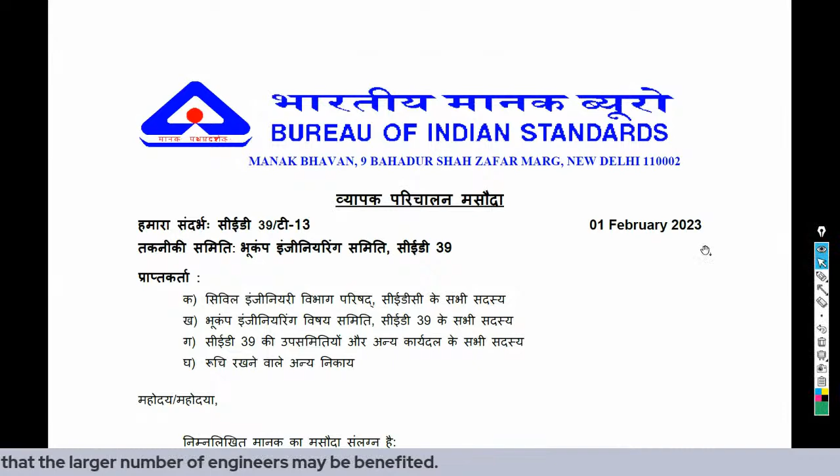Now I'll share the entire document on the screen. This is the document published by the Bureau of Indian Standards, and the last date for comments is 2nd April 2023. It's very important that we highlight important points and send them to the Bureau of Indian Standards for consideration in this draft code, because once the code is published, it's very difficult to get it revised, and it creates a lot of problems during proof checking by consultants.

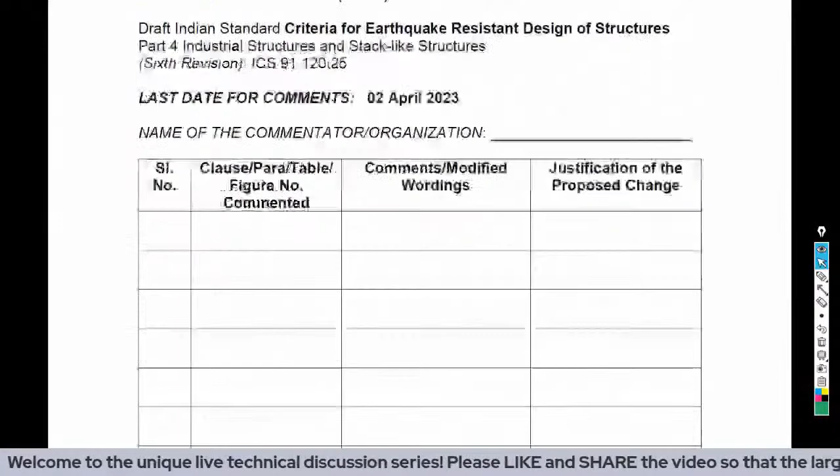This is the format in which we can send comments. In this document, I've highlighted important points noticed while comparing both documents. This is not a complete summary—it's just based on my findings—so there could be many other points.

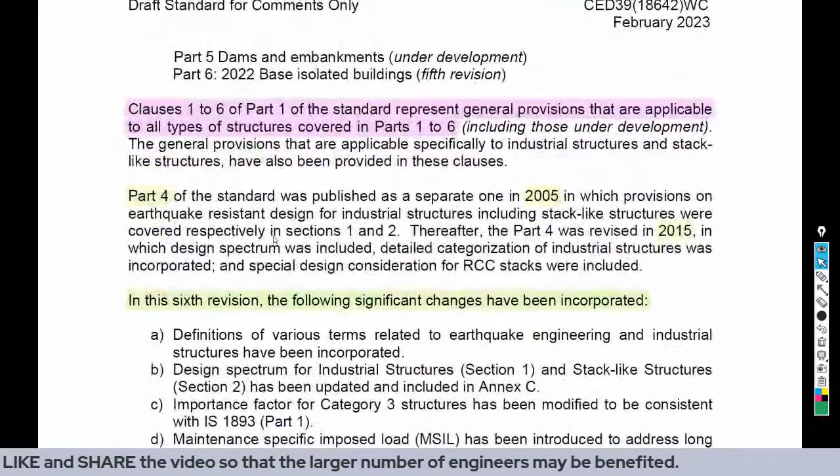In the initial part, it says certain general clauses will be included. Clause numbers 1 to 6 of Part 1 of the standard represent general provisions applicable to all types of structures covered in Parts 1 to 6. So in IS 1893 Part 1, clauses 1 to 6 will be applicable to all different parts, like Part 2, Part 3, Part 4, Part 5, Part 6, etc.

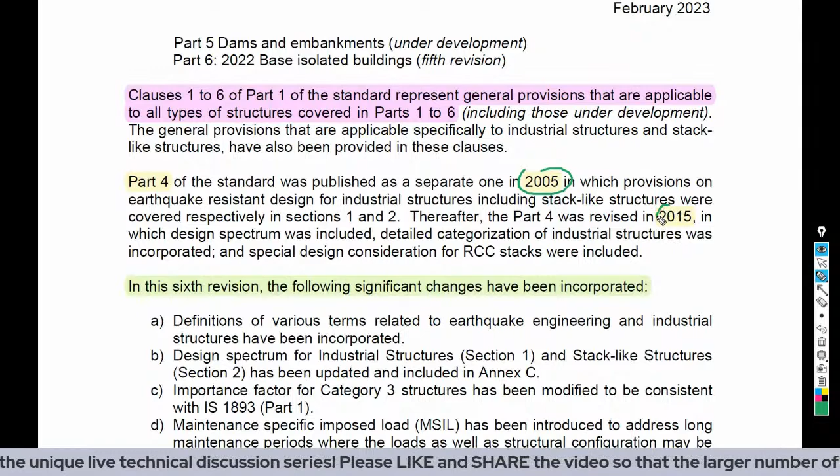As discussed, this code was first published in 2005, then revised in 2015, and now it's the sixth revision for which these changes are proposed. This list shows the significant changes that have been incorporated—let's quickly go through this.

Definitions of various terms are added for earthquake engineering and industrial structures. The design spectrum for industrial structures and stack-like structures has been updated in Figure 1 in the annexure. The importance factor for category 3 is revised, and there is a new inclusion of maintenance specific imposed load, MSIL.

So it has been introduced to address long maintenance periods where the loads as well as structural configuration may be different. Okay, so we will see this revision.

Then industrial structures have been categorized in detail. Earlier in 2015, there was just only table 6. Now there are tables 6 to 8, so there are total 3 tables: table 6, 7, and 8.

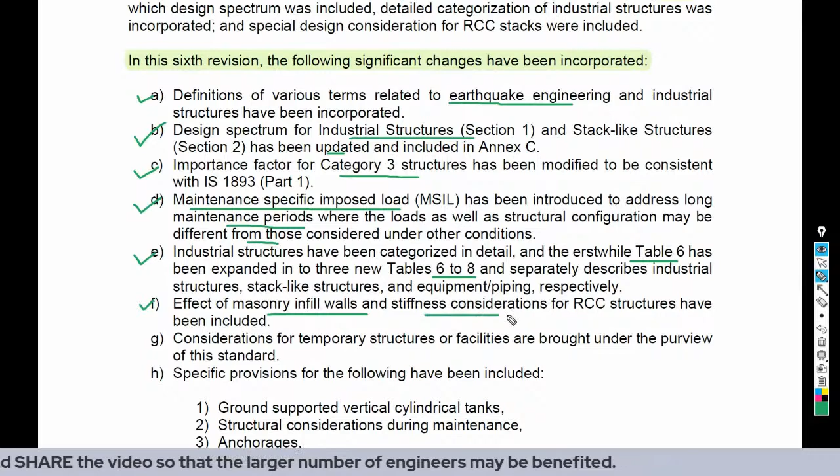Effect of masonry infill walls and stiffness considerations are included. Then consideration for temporary structures or facilities are brought under the purview of this standard.

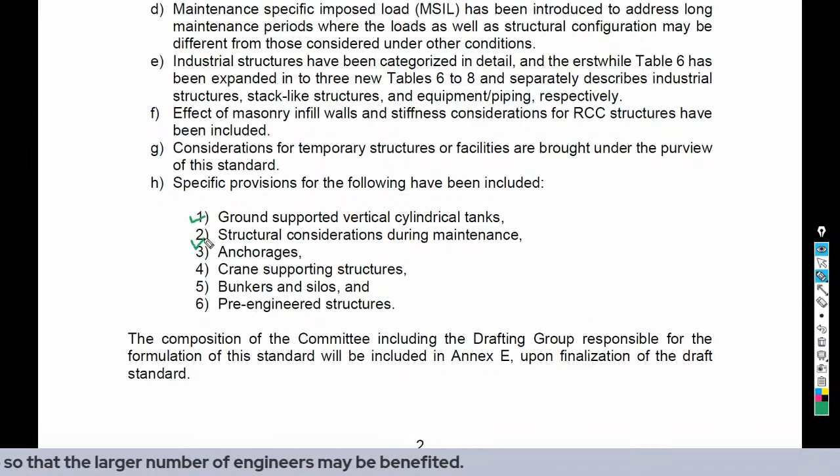And then specific provisions for different structures are now included, like ground supported vertical cylindrical tanks, then structural considerations during maintenance, anchorages, crane supporting structure, bunkers and silo, and then pre-engineered structures. So specific provisions for these structures are also included.

So apart from that, there are many other changes which I have noticed and I have just highlighted.

So firstly, it says that these provisions of earthquake resistant design of equipment and piping are under development. So we will expect now the new version or new document which will include the seismic qualification for equipment and piping. So till such time, it is said that this part 4 shall remain applicable.

Then in seismic zone 2 and 3, the temporary structures, let's say scaffolding, temporary excavations, structures or equipment needed during a scheduled shutdown or maintenance period, if for a limited time use, for example not exceeding 1 year, then it need not be designed for the earthquake force.

So what it says is that if the temporary structure is situated in zone 2 and 3, and it is meant for a time not exceeding 1 year, then in that case earthquake force need not be considered.

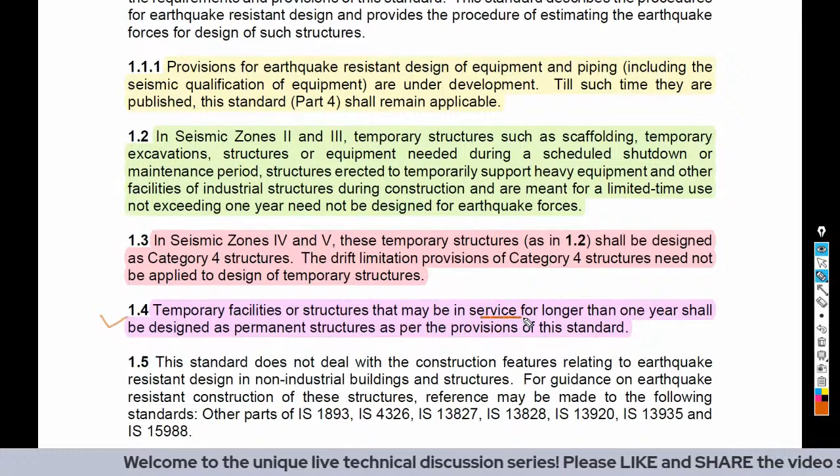And in any case, the temporary facilities or structures that may be in service for longer than 1 year shall be designed as permanent structures as per provisions of this standard. So this text is now added.

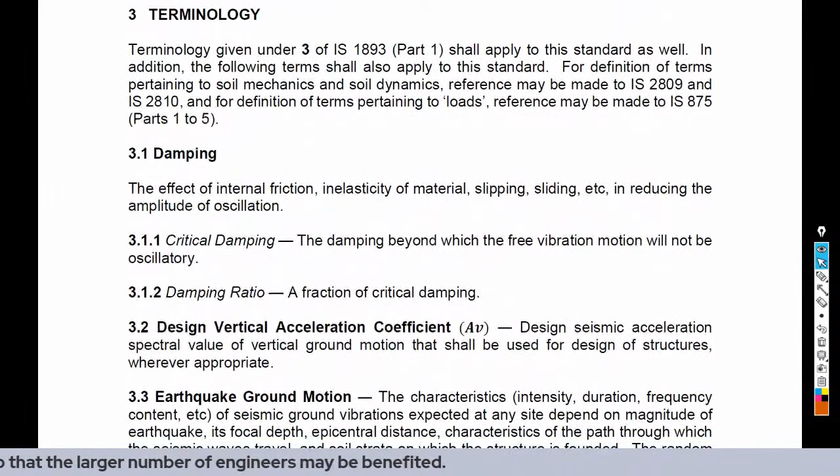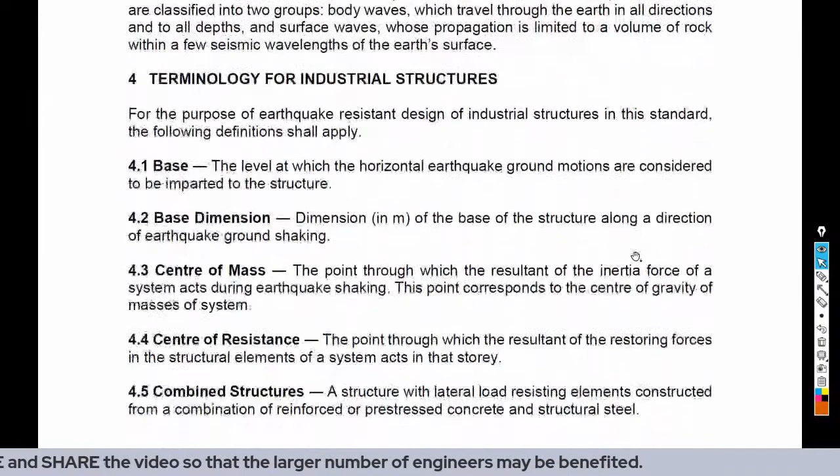Now, when we come to the terminology, the most important change is that now the definition of design basis earthquake and maximum considered earthquake, that is DBE and MCE, is now removed from this entire document to make it in line with the part one document. As you may be aware, in part one DBE and MCE is removed, so from the terminologies also this DBE and MCE is removed.

In the maintenance specific imposed load, this is a new definition added here: it's a load imposed on a specified floor area for maintenance and repair operations. So this is the definition which is now added.

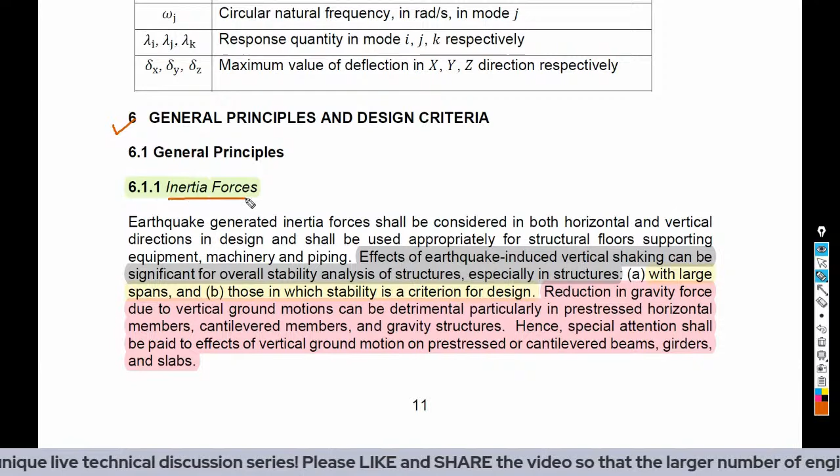Now, when we come to para number 6, which is the inertia force, it is rewritten actually. It says that the effect of earthquake-induced vertical shaking can be significant for overall stability analysis of structures, especially structures with large spans and those in which stability is the criteria for design.

What it says is that the reduction in gravity force due to vertical ground motions—let's say if you are applying vertical earthquake force on these structures, it could reduce the gravity force also. In fact, that would be detrimental, particularly in pre-stressed horizontal members or cantilever members and gravity structures. Hence, special attention shall be paid to the effect of vertical ground motion on pre-stressed or cantilevered beams, girders and slabs.

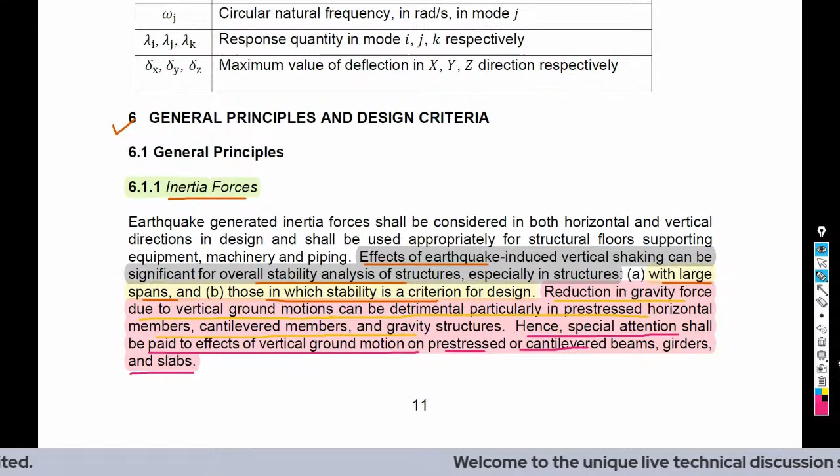Here, the actual ground accelerations experienced during earthquake by structures are much stronger than the design acceleration specified in this standard. In other words, earthquake-resistant design as per this standard actually relies on the inelastic behavior of these structures. But the maximum ductility that can be realized is limited, and therefore all structures shall be designed for at least the minimum design lateral force specified in this standard. Okay, so this is a general statement.

And this 6.1.4 is actually talking about ductile detailing. So members and connections of reinforced and pre-stressed concrete members shall be designed to ensure that premature failure does not occur due to shear or bond.

Now here in the text, this modification is made. It says that only some provisions for appropriate ductile detailing of RC members are given in IS 13920. So in the earlier document, it is said that we have to refer 13920, but now it says that only some provisions are given. Similarly, when we refer to the steel structures, again the same text is added, which says some provisions are added for the appropriate ductile detailing of the steel members. So here it is not clear what are the balance provisions which need to be considered, right?

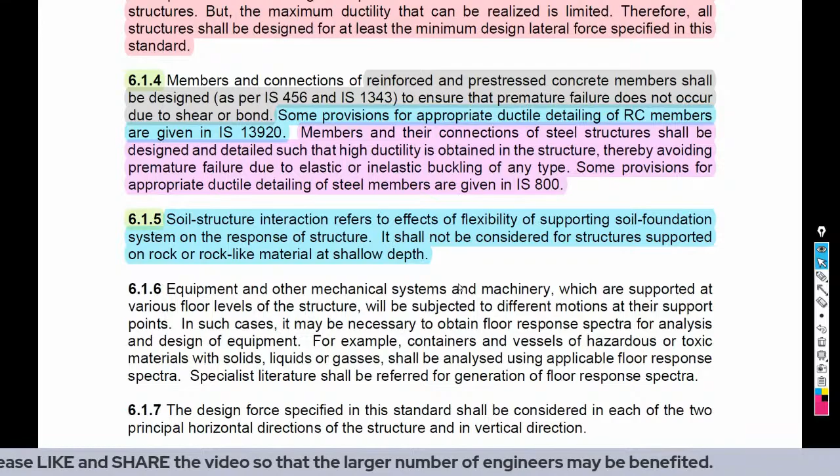The soil structure interaction was already there, but I have just highlighted it for discussion. It refers to the effects of flexibility of the supporting soil foundation system on the response of the structure. And it shall not be considered for structures which are supported on rock or very hard strata soil. So it means that soil structure interaction will be required whenever the structure is supported on medium soil or soft soil, right? Now, how to do the soil structure interaction? Only one or two sentences are now added in this document in the later part.

So this is a new addition, which is maintenance specific imposed load, and it says it shall be considered only when the maintenance duration is longer than 10 days. So when the maintenance duration is less than 10 days, then MSIL need not be combined with the earthquake forces, but shall be separately considered as a superimposed load in the structural design. So if MSIL is going to be applied on the structure for longer than 10 days, then it should be combined with the earthquake force. So this is the new addition.

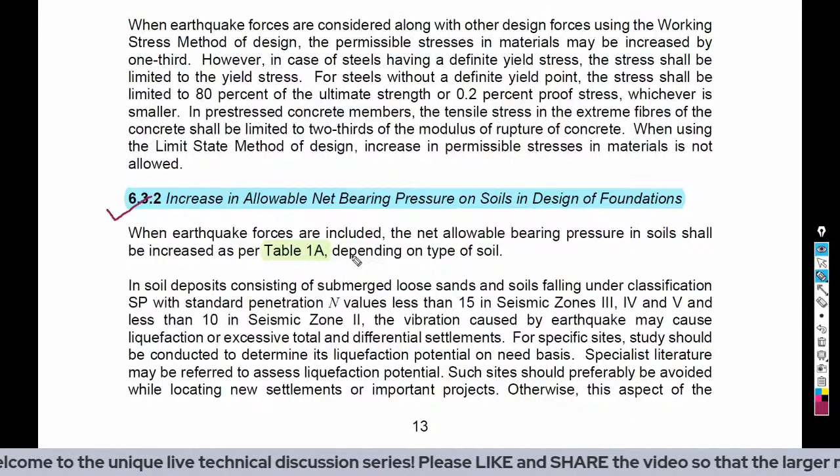Okay, now this is important when we look at the increase in the allowable net bearing pressure on soils in design of foundations. So here the entire table is rearranged, rewritten, and a few modifications are made. First of all, it is divided into two tables, table 1A and table 1B. In 2015, there was only a single table, right? So table 1A identifies the soil type, type A, type B, type C, and then the percentage increase, like 50 percent for rocky strata or hard strata soil, 25 for medium soil, and 0 percent for the soft soils.

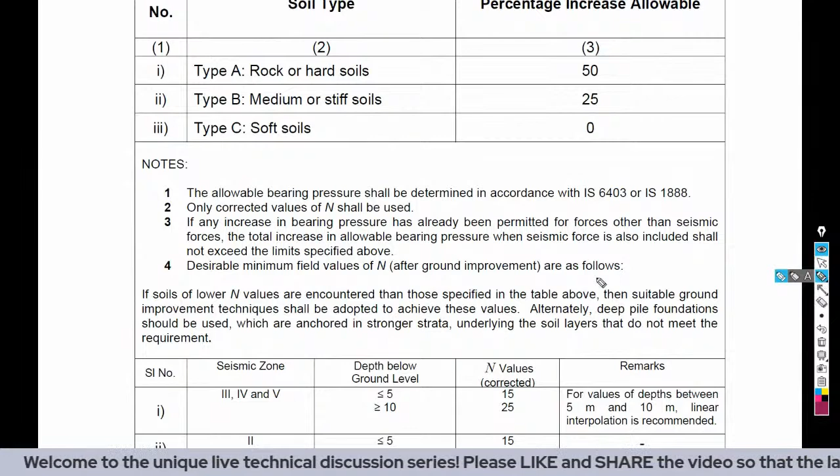Now here a couple of important things are mentioned: in this entire table, whenever we are doing this soil classification, everywhere it is mentioned that we have to use only corrected values of N. So whatever SPT values we use shall be corrected values. And for classification of soil, if we scroll down a bit, in 2015 this percentage of increase was actually defined based on the type of foundation, right?

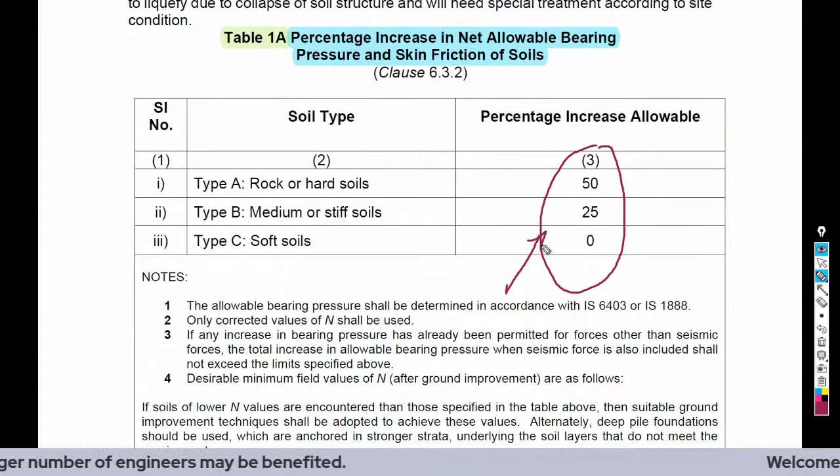So in the next part, all different types of foundations are mentioned, like isolated footings, raft foundation, pile foundation, group of pile foundation, and well foundation. And it says weighted average of N of soil layers from the depth of founding to the depth of founding plus twice the breadth of the footing. So what does it mean? We have to calculate the weighted average of corrected N value in the influence zone of the particular foundation. For each foundation, the influence zone is identified, and within that zone we calculate the weighted average value of N, again corrected. Based on that, we classify the type of soil and then refer table 1A, which we just saw on the previous page.

So for the raft foundation, the weighted average of N of soil layers from depth of founding to the depth of founding plus twice the breadth of the raft. Similarly, for all different foundations, the influence zone is identified, and based on that we find the weighted average N value. Again, N shall be the corrected value.

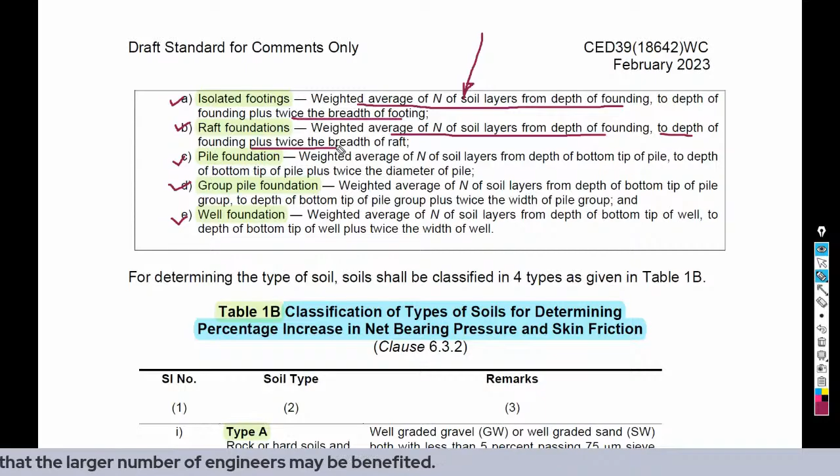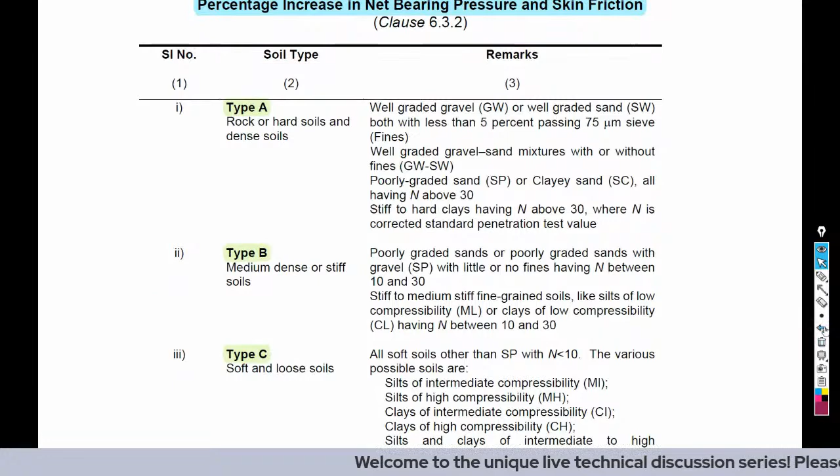And this table 1B represents the classification of types of soils for determining the percentage increase in the net bearing pressure and the skin friction. It is divided into four parts: type A, type B, and type C. When you compare this word to word, you will notice that changes are made in the description.

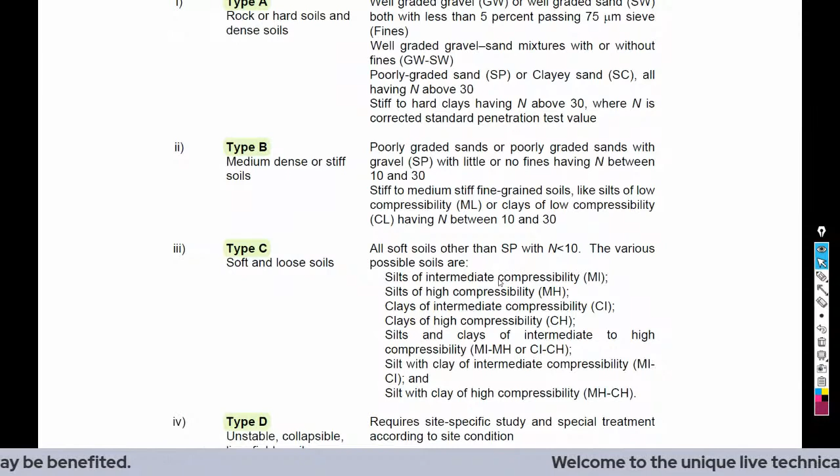Okay, so you can just refer this part. So what is the main purpose here? The changes I'm highlighting, you can just go through these changes, and if you find any practical difficulties which could be encountered, or let's say if you find any ambiguities, or you find that this clause is not appropriate, then please write to Bureau of Indian Standards. The comments can be sent up to 2nd April '23.

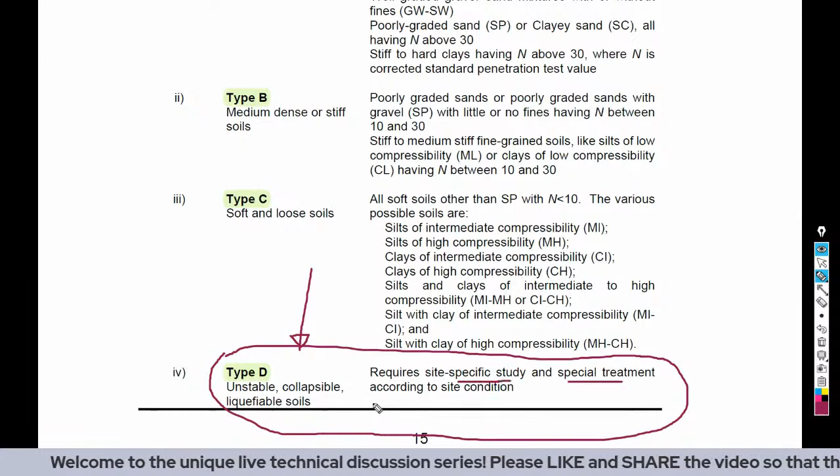Okay. And for this type D, which is the new category added, which is unstable, collapsible, and liquefiable soil, of course it will require site-specific study and special treatment according to the site conditions. Again I have highlighted here that in the entire calculation, N is the corrected standard penetration test value after ground improvement, if it is required.

Now, for the design spectrum, which is one of the most important parts of this document. As I just mentioned earlier, the concept of DBE and MCE is removed from this document, so accordingly the relevant paragraphs are updated. Here it says that for all important industrial projects and all industries dealing with highly hazardous and toxic chemicals, evaluation of site-specific spectra is recommended, and such site-specific spectra shall be considered as design spectra. So here the DBE and MCE concept is removed. And that's why, for site-specific spectra, this note is added.

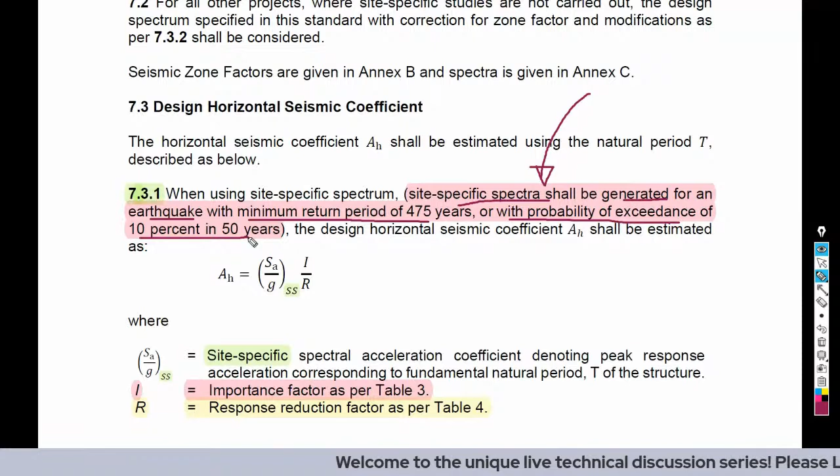What it says is that the site-specific spectra shall be generated for an earthquake with minimum return period of 475 years, or with probability of exceedance of 10% in 50 years. Since the DBE and MCE concept is removed, it is clarified that when we are doing site-specific spectra, the spectra shall be generated considering the minimum return period of 475 years, or the probability of exceedance of 10% in 50 years.

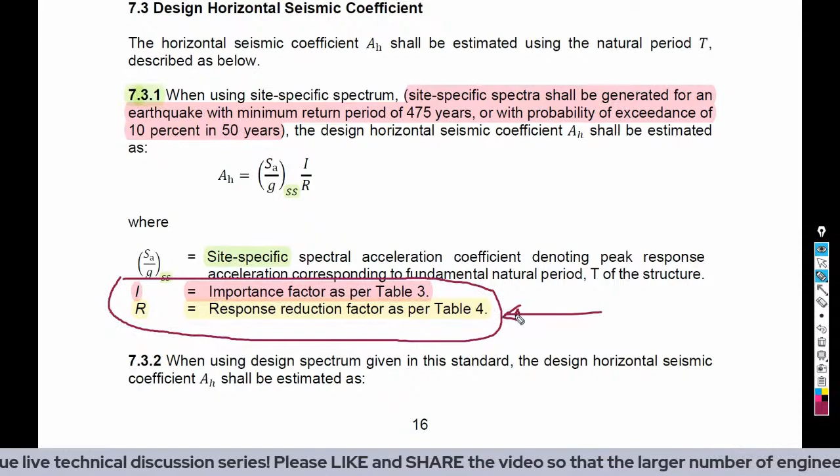So the equation which we will utilize is Ah equals Sa by g. Here Ss is mentioned, which is site-specific spectra. Otherwise, the equation is the same. Okay, one more change which I could locate here is that the importance factor and the response reduction factor are to be taken from table number 3 and 4 respectively. One note is added here, that the ratio I by R shall in no case be larger than 1. So that's obvious, we will not have this value larger than 1 in any case.

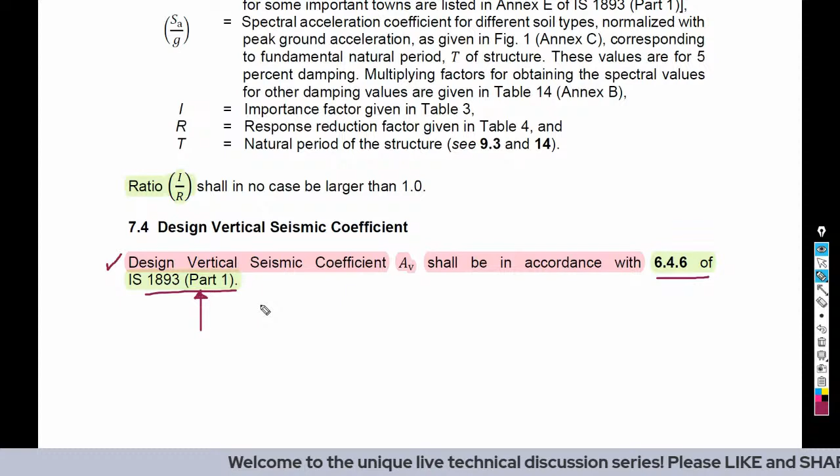Okay, for vertical seismic coefficient, now the reference is given to 6.4.6 of Part 1. So we need to refer IS 1893 Part 1. And as mentioned in IS 1893 Part 1 in the latest amendment, vertical earthquake force will be required for almost all kinds of structures. So similarly for industrial structures also, vertical earthquake force will be required to be considered.

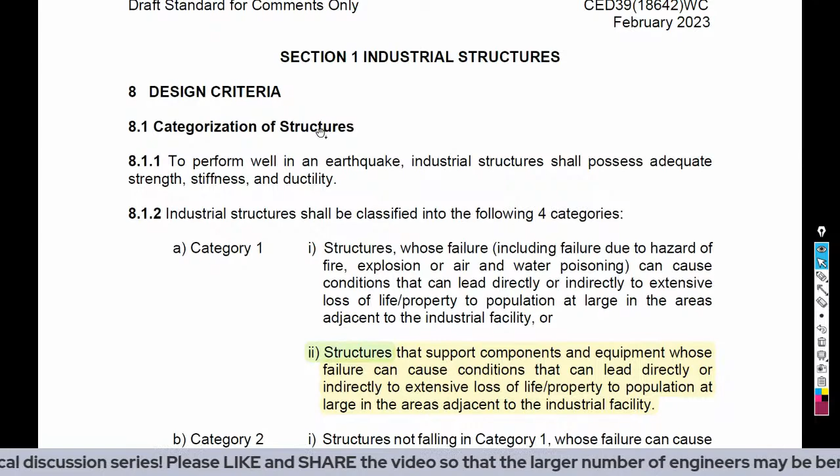Now, in this document, IS 1893 Part 4 2015, as you all know, all industrial structures were put under different categories, right? In para number 8, different categories are identified, like category 1, 2, 3, 4. And in this section, the definition of a category is amended with one more note. For category 1, this second para is added: structures that support components and equipment whose failure can cause conditions that can lead directly or indirectly to extensive loss of life or property to the population at large in the areas adjacent to the industrial facility.

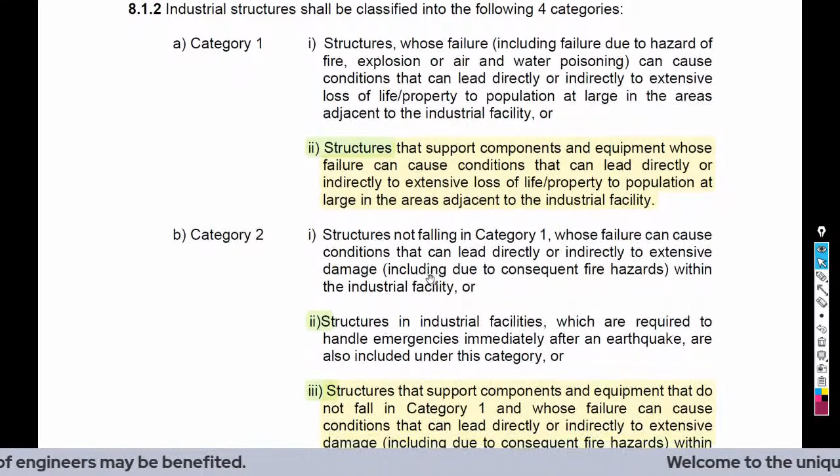In the first para, it was only addressing the structures. Now in the second para, it says that the structures which support components or equipment which can lead to extensive loss of life or property shall be considered in category 1. Similarly, paragraphs are added in category 2: structures that support components and equipment that do not fall in category 1 and whose failure can cause conditions that can lead directly or indirectly to extensive damage within the industrial facility. Right?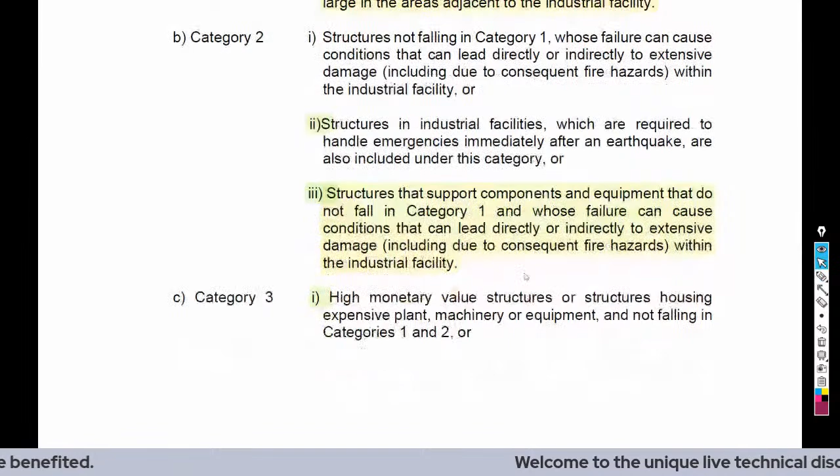Now, for the category of structures, in the 2015 document we had only table number 6. Now, a total of 3 tables are there. Table 6 is already there, table 7 is added, and table 8 is added. So now there are 3 tables for the categorization of industrial structures.

Yeah, this is one of the important points I've highlighted here. It says that equipment supported on a structure can have multiple operational scenarios, such as empty, partially full, or completely full. These operational scenarios may result in mass irregularities that shall be duly accounted for. And in the last line, it says that in case of multiple equipment supported on a structure, various possible combinations of operational conditions shall be considered.

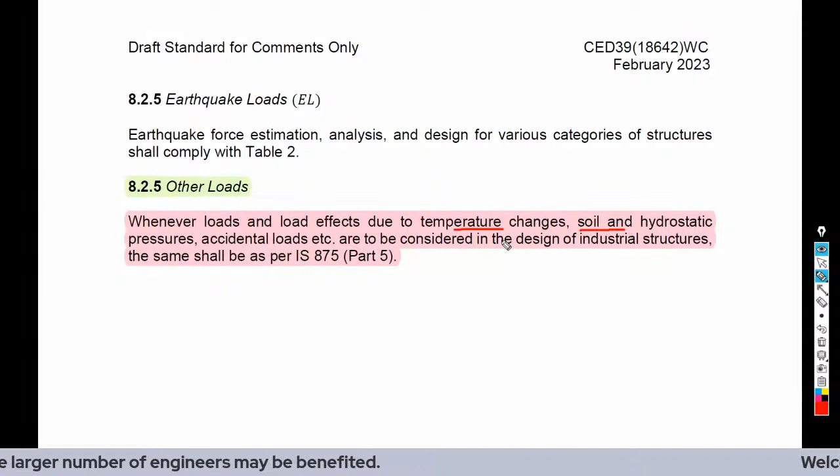So in my opinion, it will require so many permutations and combinations of considering different equipment in different conditions, like partially full, completely full, etc. And then again if you have multiple equipment, so I think this para can be revisited. And maintenance-specific imposed load should be considered as per the earlier paragraph. And if there are any other loads, like temperature changes, soil and hydrostatic pressure, accidental loads, etc., then that shall be referred as per IS 875 Part 5. So this paragraph is now added here.

Okay, this is table number 2, a very important part of this document, which is talking about earthquake force estimation, methods of analysis, and design for various categories of structures. And since 2015, one of the points of discussion is how to perform this non-linear time history analysis for verification of the collapse mechanism.

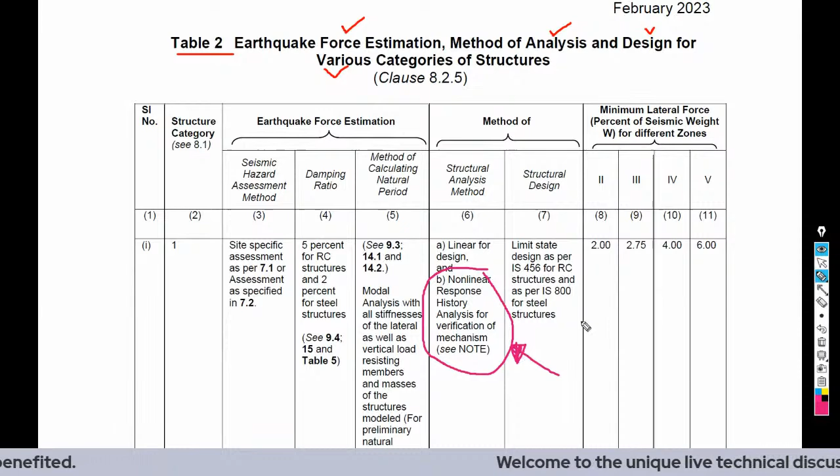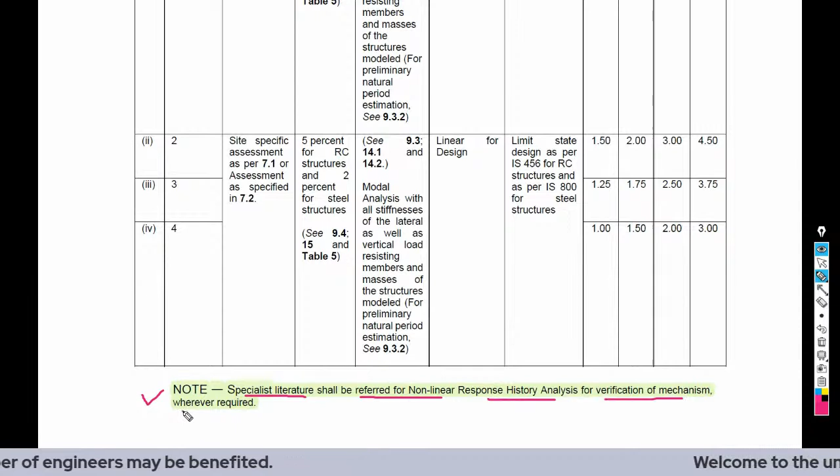So of course we attempted this in a number of projects. If you are interested, you can contact me separately about how this can be done. Of course, it's not detailed out in this document, but in this draft standard, only this note is mentioned: specialist literature shall be referred for nonlinear response history analysis for verification of mechanism wherever required.

Then these load combinations. Okay, so I have highlighted the paragraph or the text where I could notice some changes. Partial safety factor for load due to pre-stressing effect shall be as per IS 1343. If pre-stressing effect is there in the structure, then we need to consider the partial safety factor as per IS 1343. And this is the same, which is combination of different earthquake forces.

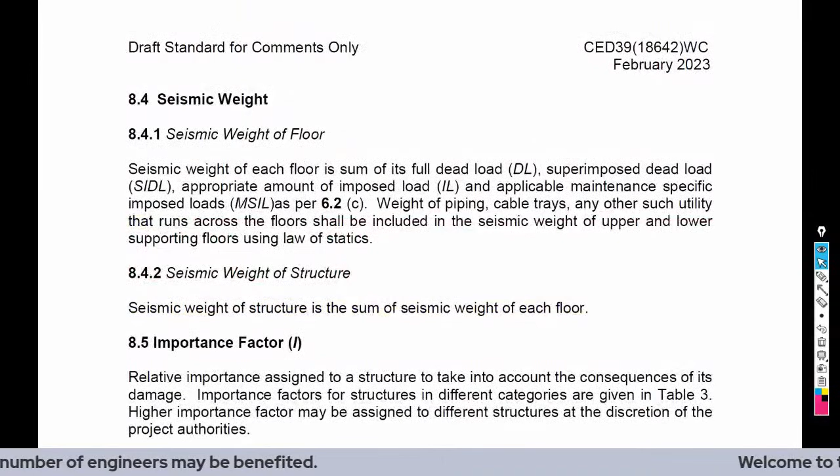This paragraph is added: the combination procedures outlined in the earlier clauses apply to the same response quantity, say moment in a column about its major axis or story shear in a frame, due to different components of the ground motion, and this combination shall be made at the member force or the stress level. So this paragraph is added. And other loads in accordance with IS 875 Part 5.

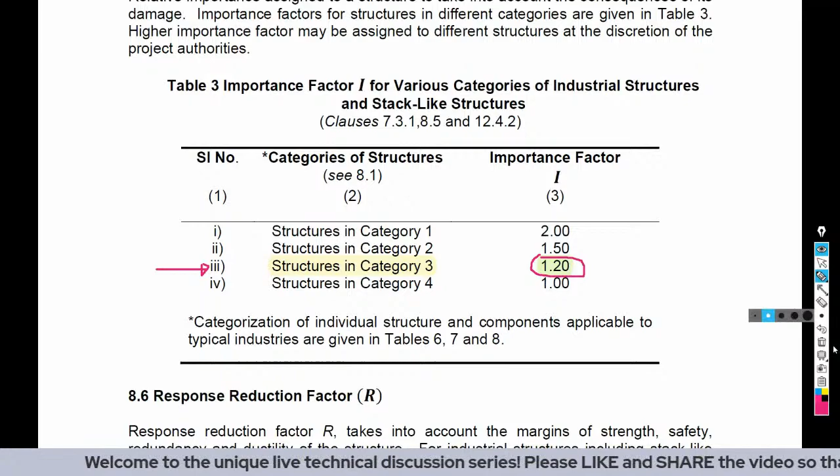For the importance factor, the value is revised. For category 3 structures, in 2015 this value is 1.25, but here it is updated as 1.20. And response reduction factor for the industrial structures and stack-like structures: here the table is combined. In 2015, there were two tables. Now both the tables are combined.

And a few provisions are added, like the flat slab, which is a two-way slab without beams; in that case, the response reduction factor is 2.5. And for structures which are designed to remain elastic, the R value is 1. And for all other stack-like structures, the values are now added in this table only, so you can refer to this. There are a few notes added, so I highlighted which were different from Part 4 2015.

Flat slabs, two-way slabs without beams, as a part of the lateral force resisting system are permitted only in seismic zones 2 and 3 for buildings with height less than 20 meters. So if you want to use the flat slab for industrial structures, the height of the building shall be less than 20 meters and the seismic zone shall be either 2 or 3. The eccentric braced frames shall be used only with the SBF frame.

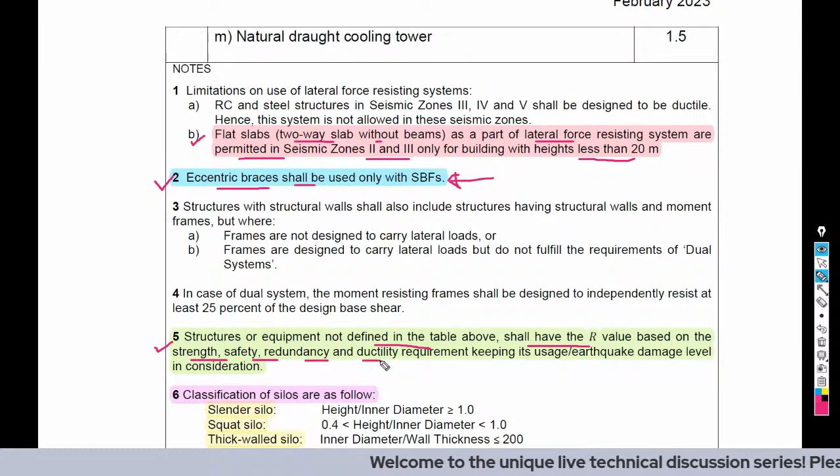Then one more note is added that the structure or equipment not defined in the table above shall have the R value based on the strength, safety, redundancy, and ductility requirements, keeping its usage or the earthquake damage level in consideration. So it defines the methodology in a general context for how we can derive the R value.

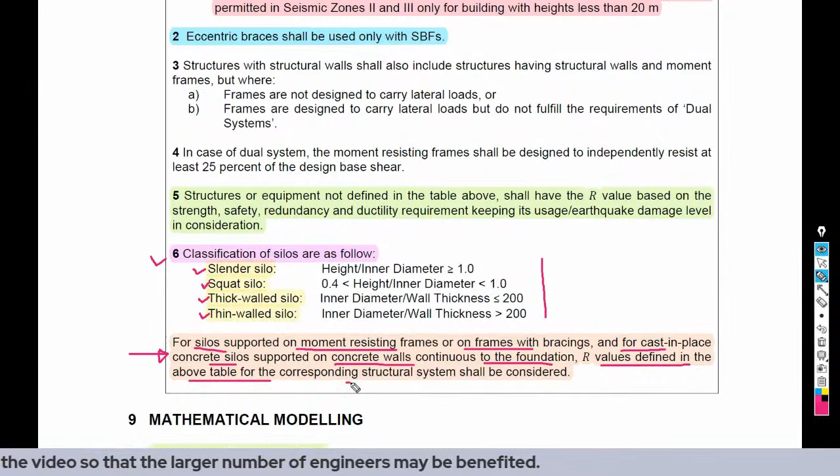And one more paragraph is added, which is the classification of silos. It defines silos in different categories, like slender silo, squat silo, thick-walled silo, thin-walled silo, and different criteria are given here. It also says that for silos supported on moment resisting frames or on braced frames, and for cast-in-place concrete silos supported on concrete walls continuous to the foundation, R values defined in the above table for the corresponding structural system shall be considered. Okay.

So you can refer this table and then compare with the part 4 2015, and you can send your input to BIS if any.

Now for the mathematical modeling, there are a few important changes made here. So one note is added here: the mathematical model of the physical structure shall include all elements of the lateral force resisting system, obviously, and then also the model shall include the stiffness and strength of the elements which are required for the distribution of forces.

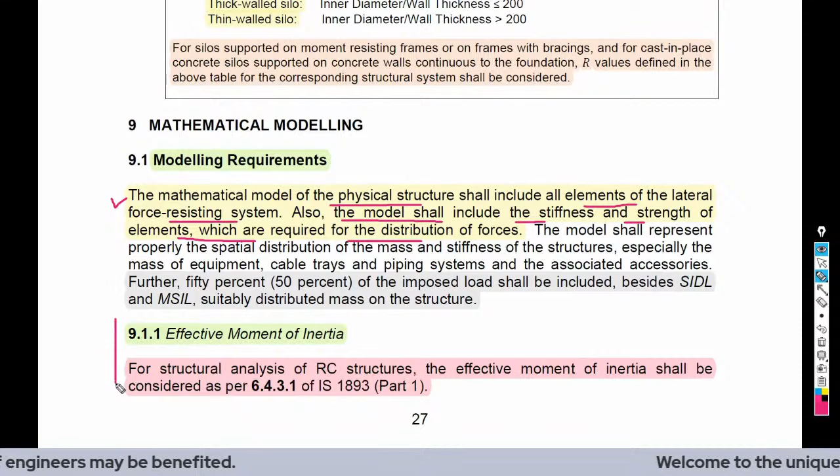Now this is one of the major change which is done here, that the effective moment of inertia, that means the stiffness modifier, which was introduced in IS 1893 part 1. So those stiffness modifier for RC structures shall be considered as per IS 1893 part 1. Now this will bring potential difficulty according to me, because once we introduced these stiffness modifier, actually our industrial structures will become quite flexible, because we are introducing those fictitious amount of cracked moment of inertia.

Now specifically for the industrial structure, there is no upper cap or there is no defined limit for the time period. And because of that, the structures will become extremely or quite flexible. So I strongly believe that this paragraph should be revisited, and if it needs to be introduced, then few more considerations needs to be mentioned specifically for the time period of the structure.

For soil pile interaction, it says again that the specialist literature may be referred to include this effect. But it makes this statement also that maximum reduction. So whenever we are performing soil structure, or let's say soil pile structure interaction, then it could bring down the base shear, because it may result into relatively higher flexibility in the model. So it defines that maximum reduction in the base shear on account of this soil structure interaction shall not be more than 20% of the base shear of the fixed base structure.

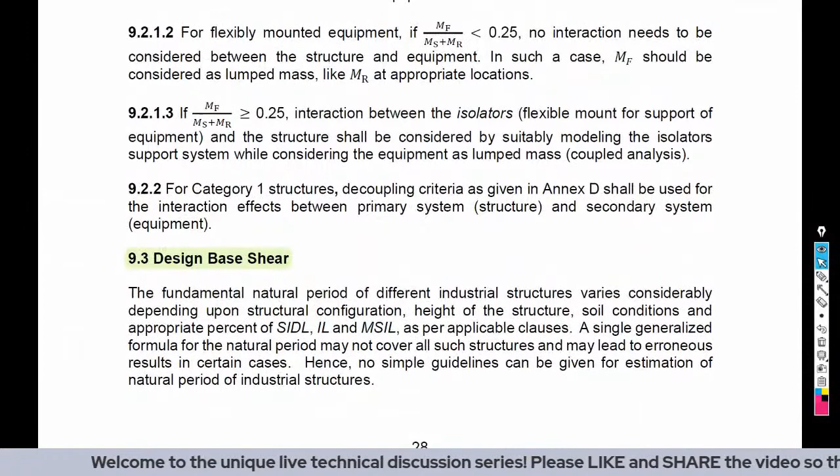Okay, and here in the design base shear, it is adding the concept of masonry infill. So if masonry infill walls are present in the structure, then couple of paragraphs are added in line with IS 1893 part 1. So what it says that these walls will contribute to the in-plane stiffness of the structure.

So that's why it is suggesting to create two different mathematical models for the design. So in the first mathematical model, the stiffness of infill wall panel shall be accounted and modeled as diagonal struts as per part 1. And this model shall be used for estimation of the natural period and story drifts. So what will happen once we insert infill panel, the structure will become quite rigid, time period will reduce, and the seismic force or the base shear will increase, right?

Thereafter, we have to create another model, the second mathematical model, which shall represent only the bare frame structure, that is without infills, and shall be used for the estimation of forces in the structural members. Because if we have modeled the infill brick wall or the diagonal struts, and if we analyze that structure, we will not get any forces in the beams and columns.

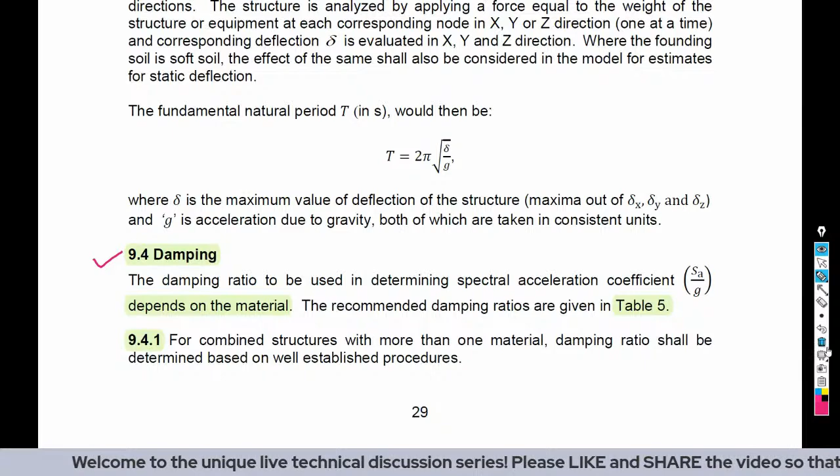And couple of notes are added for the damping also, that the estimated composite modal damping values when using materials which are listed in table 5 shall be limited to 20%. So that is the maximum limit of damping, which is 20% of critical damping, even when soil structure interaction effects are considered. Then the damping ratio of water and other liquid contained in tanks shall be considered as 0.5 percentage, and the damping ratio for the granular materials contained in tanks and silos shall be considered as 10 percentage.

And if you refer to this table number 5, here we can see that for the steel structure, damping is 0.02 or 2 percentage, and for the reinforced concrete, it is 5 percentage. So here you can see that again, concept of DBE and MCE is removed.

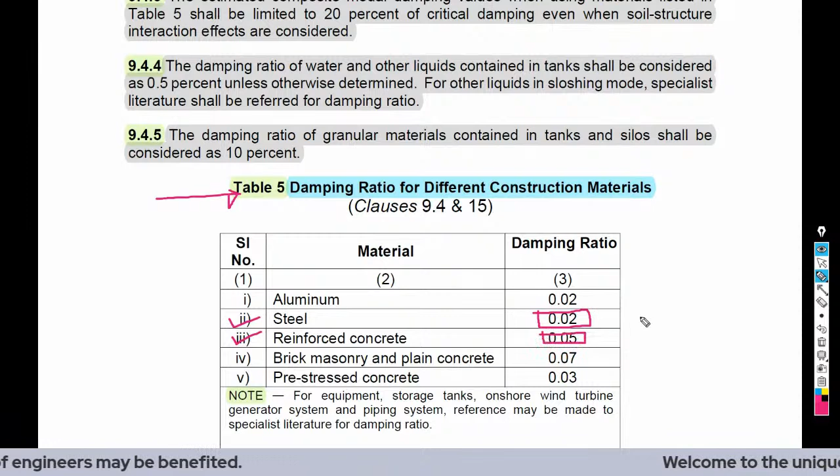In 2015, the damping values were defined for DBE and MCE separately. So this concept is now removed. Okay, when we come to the dynamic analysis, this is one of the paras where there are minor changes. Category 4 structures which are identified as buildings and whose failure does not affect plant performance: the line which is added is that they shall be analyzed and designed in accordance with the provisions of IS 1893 Part 1.

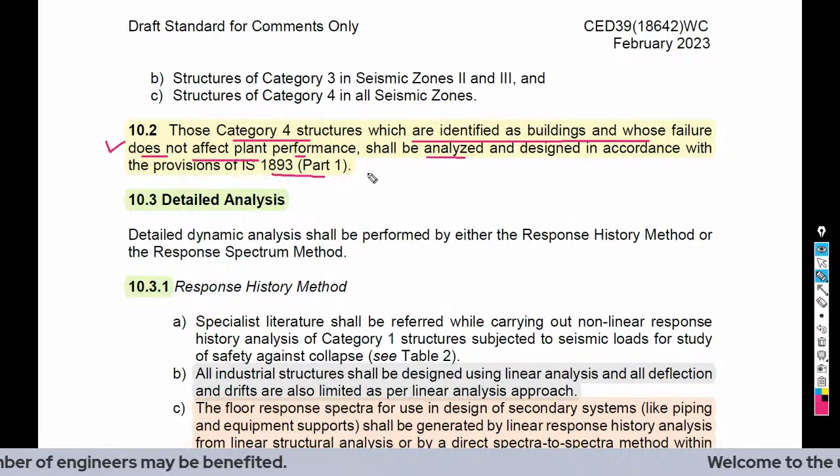For the detailed analysis, there is a change made in 2 notes, like all industrial structures shall be designed using linear analysis, and all deflections and drifts are also limited as per the linear analysis approach. And the requirement of floor response spectra is highlighted for design of, let's say, piping and equipment in this paragraph. This is the response spectrum method. Of course, response spectrum method has a number of limitations that we can discuss separately.

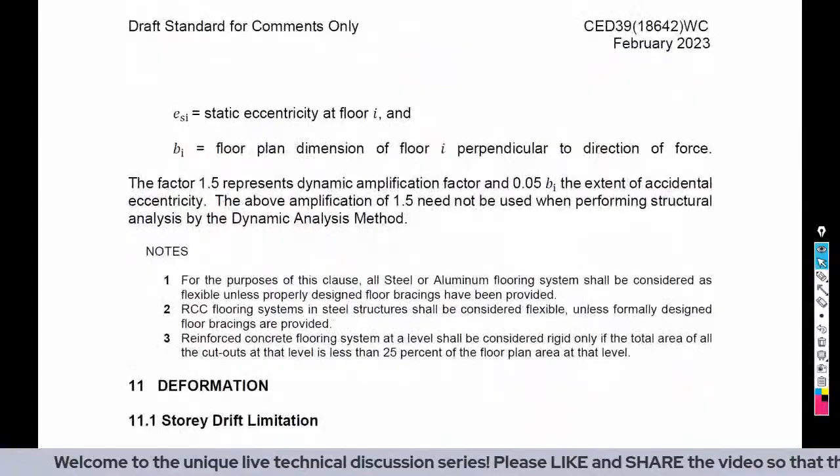This is the torsion. Then for separation between adjacent units, the equation is now updated like square root of R1 delta 1 square plus R2 delta 2 square, where R1, R2 are the response reduction factors of building 1 and building 2, and delta 1, delta 2 are the displacements. So delta separation we'll get from this equation, and this equation is now added here.

For foundation, isolated RC footings without tie beams or unreinforced strip foundations shall not be permitted in soft soil in any seismic zones. Foundations that are vulnerable to significant differential settlement due to ground shaking shall not be used for structures in seismic zones 3, 4, and 5. And in seismic zones 4 and 5, individual spread footings or pile caps shall be interconnected with ties. It was already there in the previous version also, except when individual spread footings are directly supported on rock.

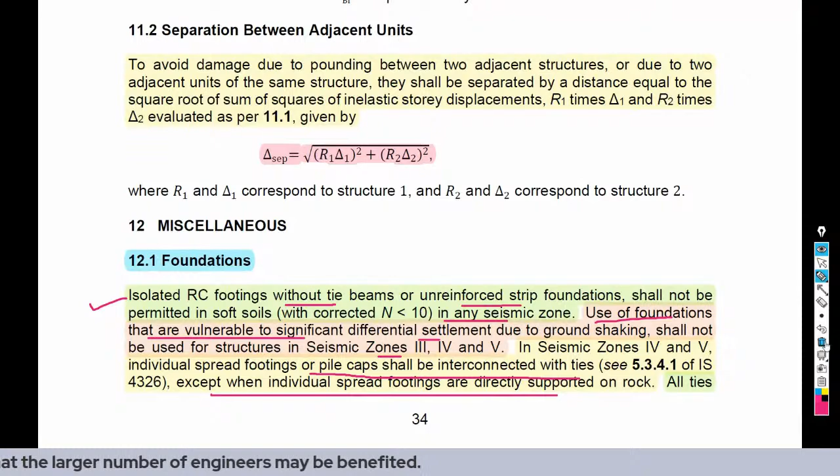And all the ties shall be capable of taking AH by 4 times the force. Now, one line which is added here: subjected to a minimum of 5% of the larger of the column or pile cap loads. Here AH is as per 7.3.1 or 7.3.2. So this AH over 4 requirement is already there in the existing standard, and the last part of the paragraph mentions the minimum requirement, 5% of the larger of the column or pile cap loads, which needs to be considered for design of tie members.

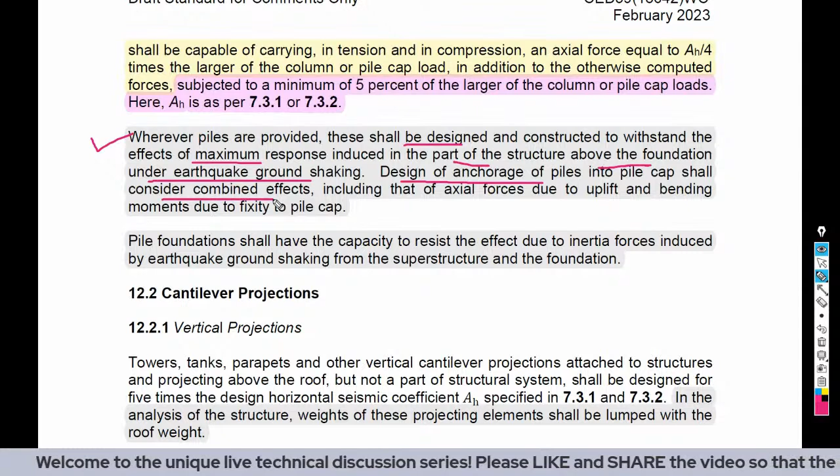And here it says that wherever piles are provided, they shall be designed and constructed to withstand the effects of maximum response induced in the part of the structure above the foundation under earthquake ground shaking. And design of anchorage of piles into pile cap shall consider all combined effects like axial forces due to uplift and bending moment due to fixity of pile cap, etc. For the cantilever projection, this last line is added: in the analysis of the structure, the weights of these projecting elements shall be lumped with the roof weight.

Then, this is one more addition, which is non-structural elements in the industrial structure. What it says here: specialist literature shall be referred for earthquake resistant design of non-structural elements, NSE, of industrial systems such as cable trays, bus ducts, HVAC ducting, piping, etc. The provisions given in IS 16700 also may be used. So this is a new addition.

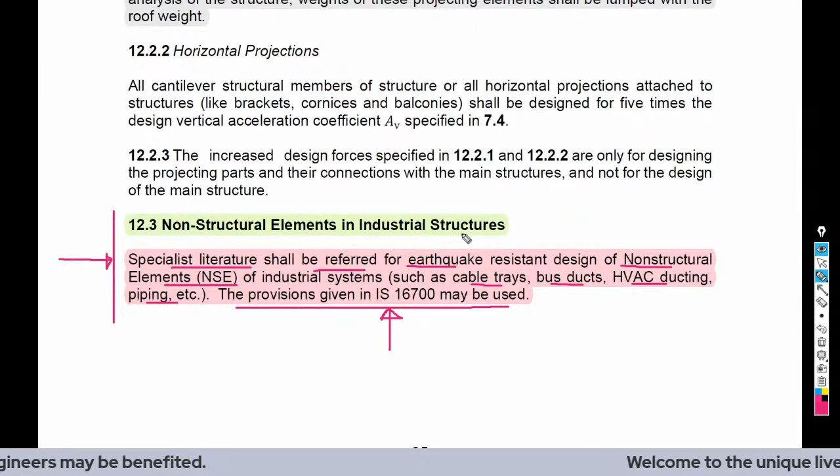Of course, it is giving reference to the specialist literature, but it will require a lot of other calculations and separate work for establishing that non-structural elements are also safe in seismic events. So this actually needs to be detailed out. There should be a complete separate chapter or document on this so that we can consider it effectively. Right.

Then there are additional provisions for a few different structures which are added now. One of them is the crane supporting structure. Here it clarifies that while evaluating earthquake ground shaking effects on the crane supporting structure in horizontal direction, the seismic mass of cranes and trolleys without payloads shall be considered. So that means we will consider cranes or trolleys in the parked condition. They will not be considered in the operating condition during a seismic event.

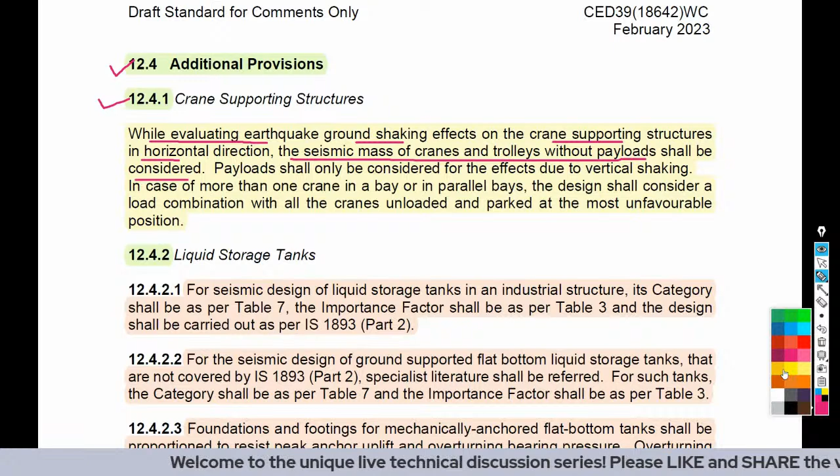And these payloads shall only be considered for the effects due to vertical shaking. In case of more than one crane in a bay or in parallel bays, the design shall consider a load combination with all the cranes unloaded and parked at the most unfavorable position.

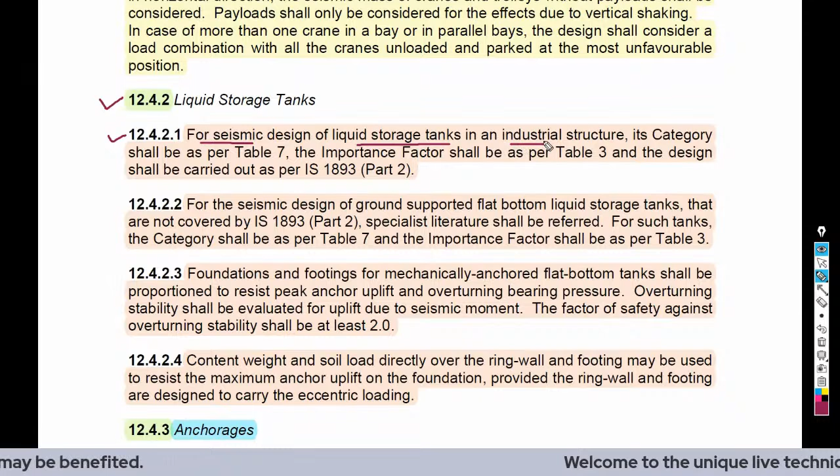Then for a liquid storage tank, for seismic design of liquid storage tank in an industrial structure, its category shall be as per table number 7, and the importance factor shall be as per table number 3, as mentioned earlier. And the design shall be carried out as per IS 1893 part 2. So this is for seismic design of liquid storage tank in the industrial structure.

In the next para, it says that for the seismic design of ground supported flat bottom liquid storage tanks, which are not covered by IS 1893 part 2, specialist literature shall be referred for the same. And for such tanks, the category shall be as per table number 7 and the importance factor shall be as per table number 3.

Then foundations and footings for mechanically anchored flat bottom tanks shall be proportioned to resist peak anchor uplift and overturning bearing pressure. Overturning stability shall be evaluated for uplift due to seismic moment, and the factor of safety against overturning stability shall be at least 2.0.

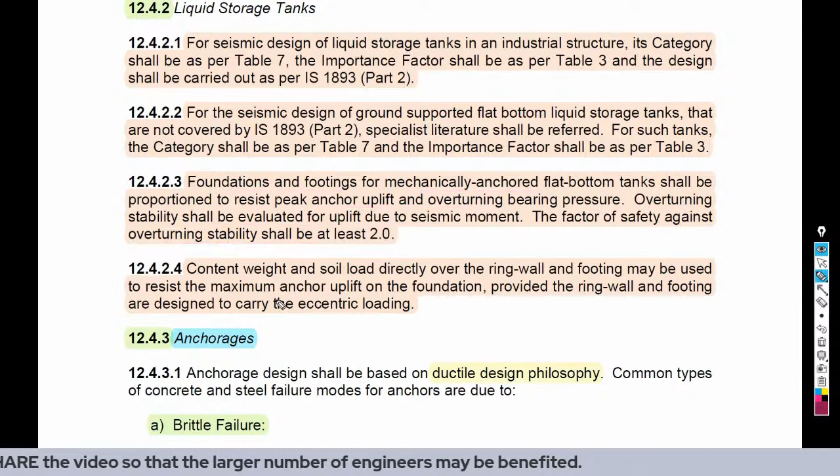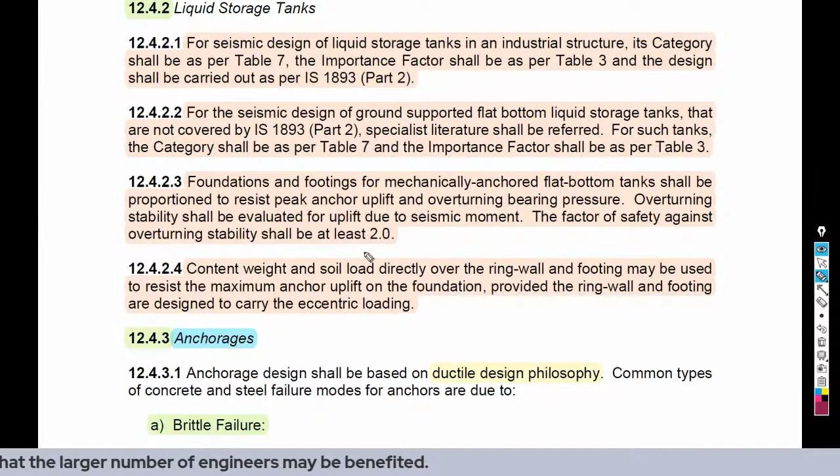And content weight and soil load directly over the ring wall and footing may be used for the stability, to resist the maximum anchor uplift on the foundation, provided that the ring wall and the footing are designed to carry the eccentric loading. Then the next para is identifying requirements for the anchorages.

So the anchorages design shall be based on ductile design philosophy, and common types of concrete and steel failure modes for anchors are due to brittle failure, like failure of the concrete part considering concrete breakout strength of anchor in tension, pull out strength of anchor in tension, side face blowout of concrete, then bond strength of adhesive anchor in tension, concrete breakout strength of anchor in shear, or concrete pry out strength of anchor in shear as applicable. So here it is just identifying the probable mode of failure when brittle failure occurs.

In the next para, it's talking about the ductile failure, that is failure of the anchors based on steel strength of anchor in tension and steel strength of anchors in shear. So the following shall be ensured in the design of ductile anchorage system. Firstly, the anchoring capacity of the concrete shall be greater than 1.2 times that of the nominal tensile capacity of the anchor bolt.

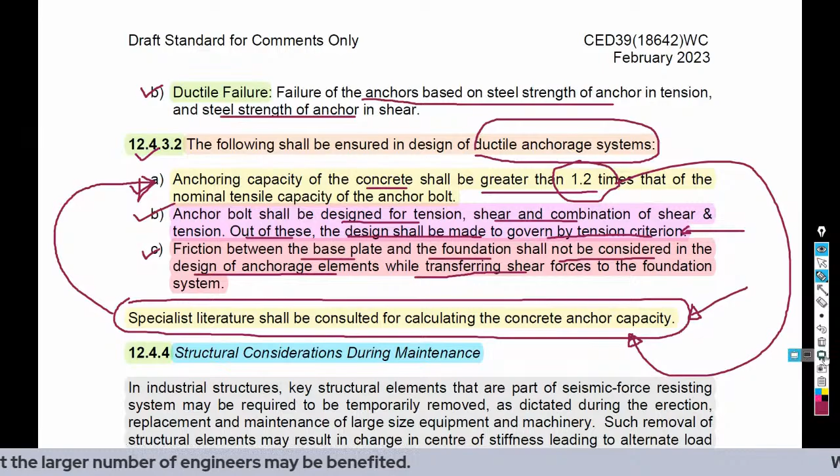Then structural consideration during maintenance, because in industrial structures, maintenance is always one of the key areas. So what it says is that in industrial structures, the key structural elements that are part of seismic force resisting system may be required to be temporarily removed as dictated during, let's say, erection, replacement, or maintenance, etc. Now, such removal of structural elements may result in change in center of stiffness, leading to an alternate load path for resisting the seismic forces than originally designed. So for such structures, seismic analysis shall be carried out for both conditions, that is, with and without removal of these key structural elements. And further, structural stability shall be assessed under both these conditions. Okay, so this paragraph is added now.

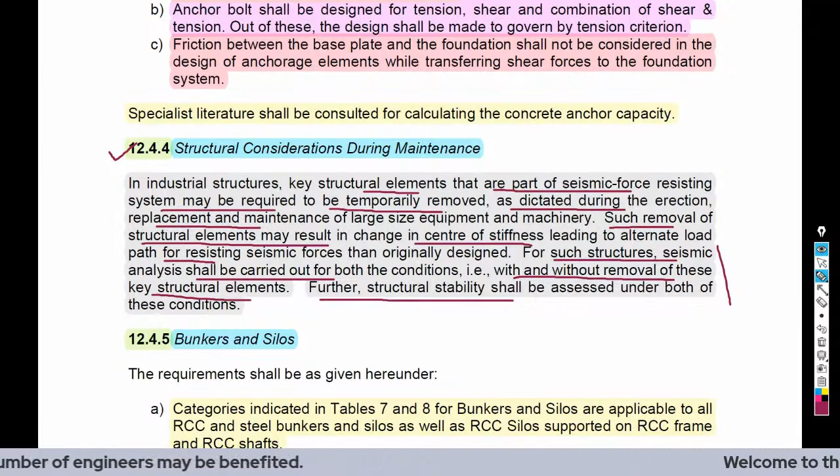For bunkers and silos, the requirement shall be as given here under. Categories are indicated in table number 7 and 8 for the bunkers and silos, applicable to all RCC and steel bunkers and silos, as well as RCC silos supported on RCC frame and RCC shaft.

Silos and bunkers shall be designed to withstand the seismic forces, considering the full range of material loading from empty to full. Then the effects of earthquake ground shaking in the supporting structure shall be estimated, assuming that the particulate contents move together with the silo shell and modeling them with their effective mass at their center of gravity.

The effective mass of at least 80% of the total content mass shall be considered while determining the seismic force, and the unit weight of stored material used for computing seismic force shall be same as that used for all load calculations.

So these requirements are now added for the bunkers and silos.

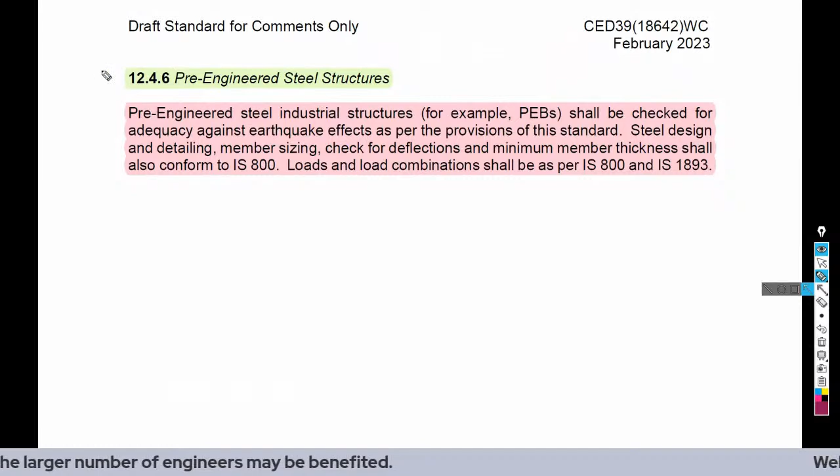This is one more major change proposed here, for all pre-engineered steel structures. This is always a point of debate whenever we come across pre-engineered steel structures. It mentions clearly that pre-engineered steel structures, for example PEBs, shall be checked for adequacy against earthquake effects as per the provisions of this standard. Steel design and detailing, member sizing, check for deflections and minimum member thickness shall also conform to IS 800. For loads and load combinations, we shall refer to IS 800 and IS 1893.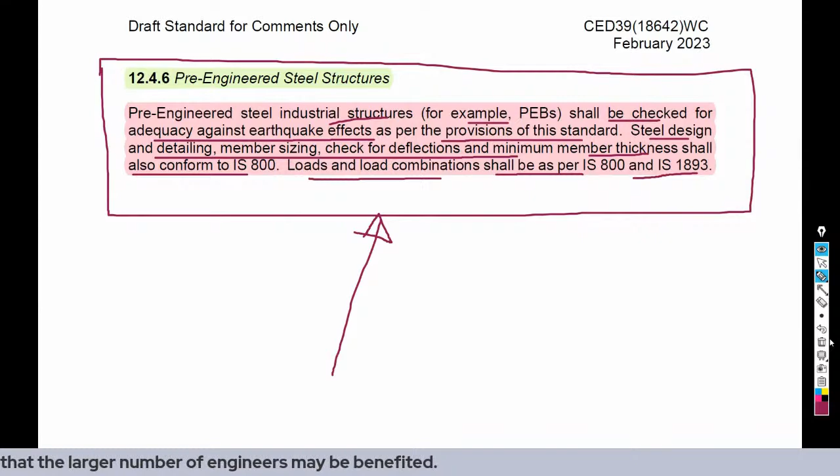Now from table number 6, it is identifying the categorization of industrial structures. In part 4 of 2015, there was only one table in which the categorization of different categories of industrial structures was identified. But here, the categories of industrial structures are added in 3 tables. So first, this is table number 6. We can see different structures are added. You can refer to this table and share your input related to this.

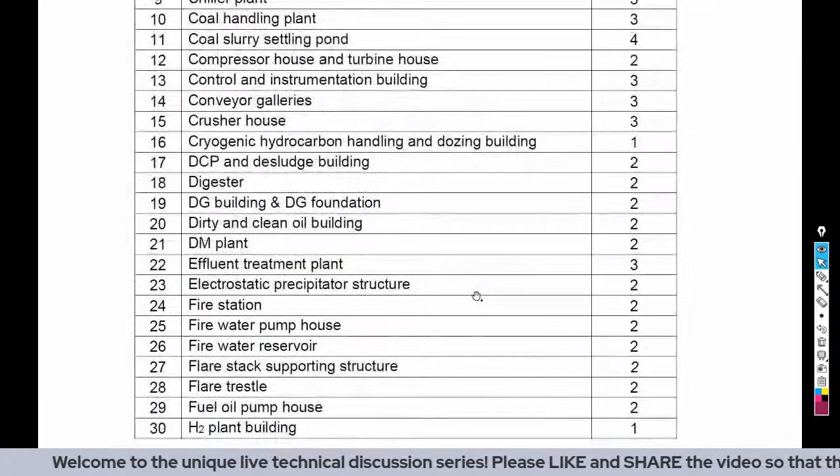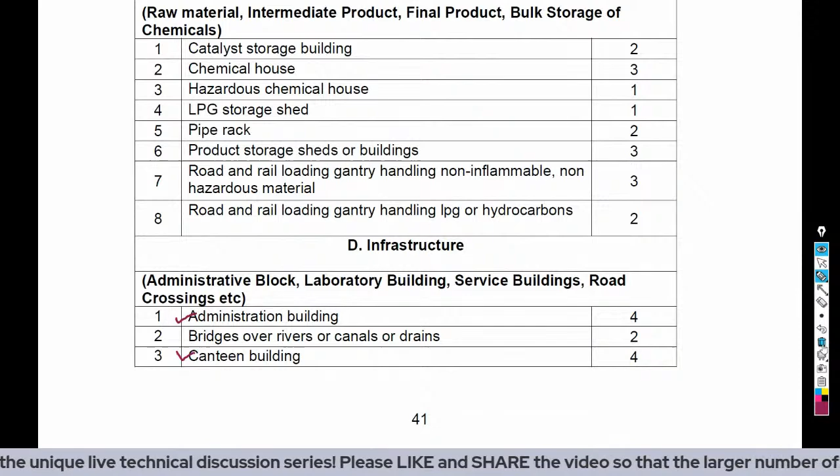If we quickly look at this category, first this is main plants and process plants, under which all different structures are identified. Then type B is for utilities, where structures for different utilities are identified. We can see all structures for different utilities. When we scroll down, we get into storage and handling. Part C is talking about storage and handling, like catalyst storage building, chemical house, pipe rack, etc. And part D is the infrastructure type of building, like administration building, canteen building, etc. So this is table number 6.

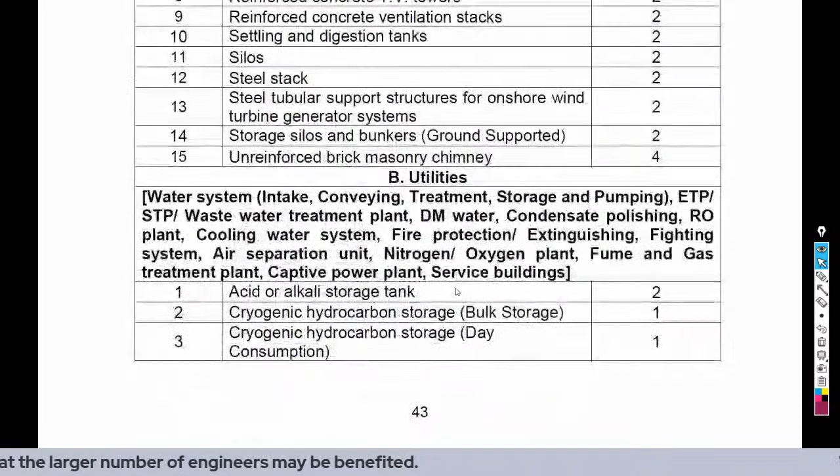Now 2 more tables are added. This is table number 7, which talks about categorization of industrial stack-like structures and ground supported structures. It is again divided into different categories. First is part A, the main plant and process plants, including power plants, hydrocarbon plants, chemical, fertilizer, metallurgy, etc. Here we can see different equipment like coke drum, HRSG stack, process column, reinforced brick masonry chimney, silo, etc. Then part B covers different utilities, meaning equipment associated with different utilities. Then storage and handling comes under part C.

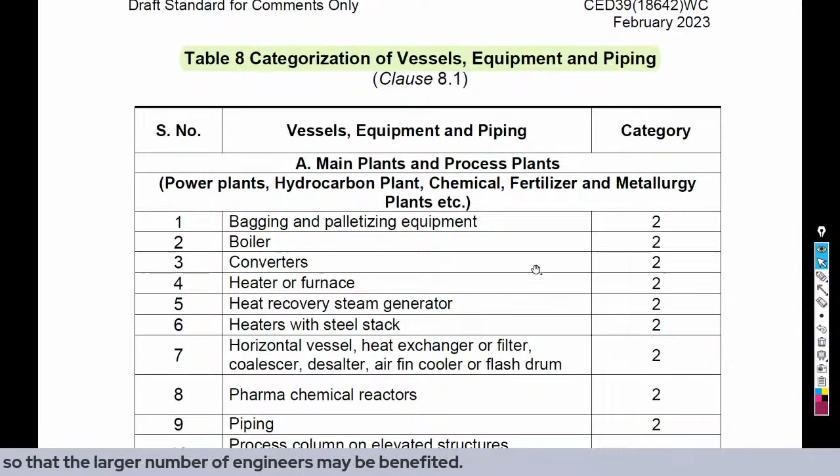Finally, there is table number 8, which talks about categorization of vessels, equipment, and piping. That is also defined in several parts. First is the main plant and process plants, like power plants, hydrocarbon plants, etc. It includes bagging and palletizing equipment, boiler, converters, heater, etc. Categories are always mentioned for all different items. You can refer to these tables in detail and share your input if any. Part B is for utilities, and in utilities all different equipment, or vessel, equipment and piping, is added here. Then storage and handling.

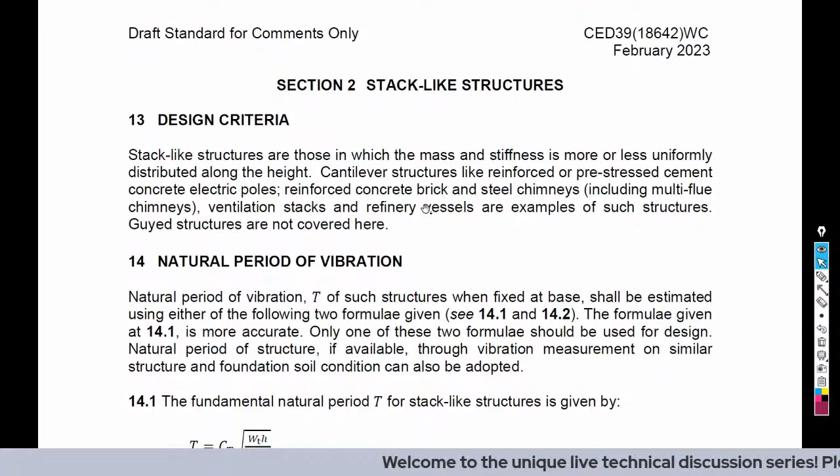Then section 2 starts with the stack-like structures. In stack-like structures, the damping ratio for different materials to be used is determined in table number 5, which is the same table referred to during our earlier discussion. Otherwise, I could not locate any major difference. But if you find anything, you can share it with me, or if you have any comments, you can share directly with the BIS.

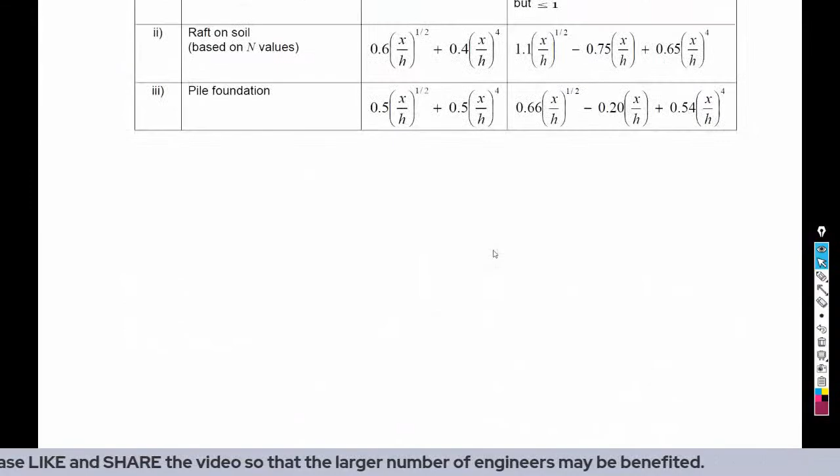These texts I generally find almost similar, including the deflection criteria. This is annexure A, which is the cross-referred standards.

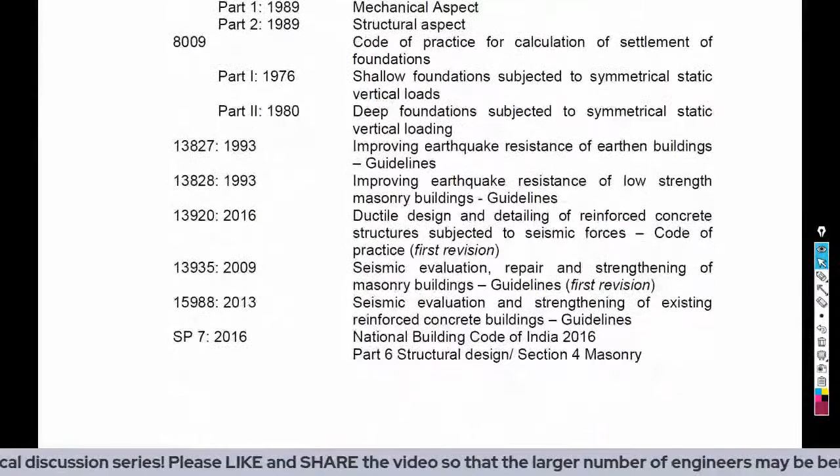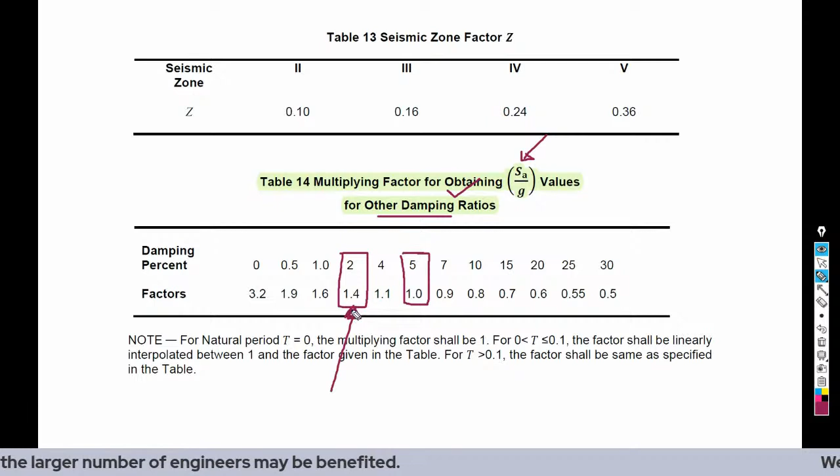This is table number 14, for the multiplying factor for obtaining the values of Sa by g for other damping ratios. For 5%, this value is 1, and for 2%, like for steel structures, this value will be amplified by 1.4 times. So this anomaly still remains between the two standards. Part 1 says damping is only 5% to be considered, but here again the damping value is different, even in this revised or draft standard.

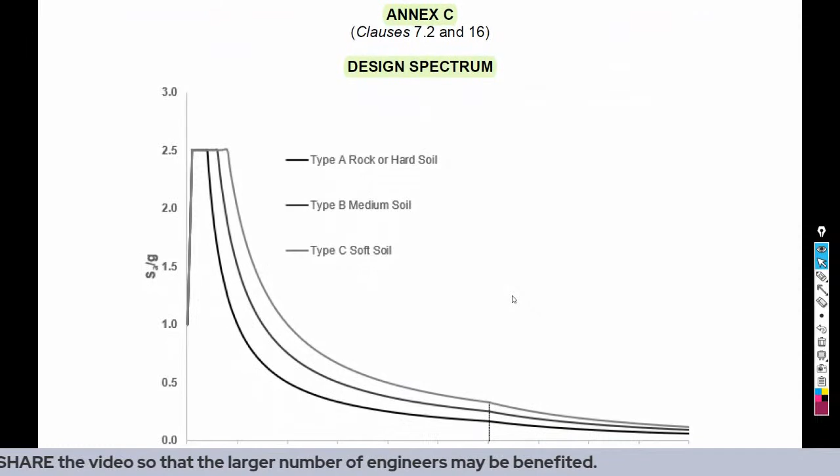This is the last part of the document. In annexure C, the design spectrum is now updated, and it is mentioned for different types of soil, like type A, type B, type C. This is the natural period on one axis, and Sa by g on the other.

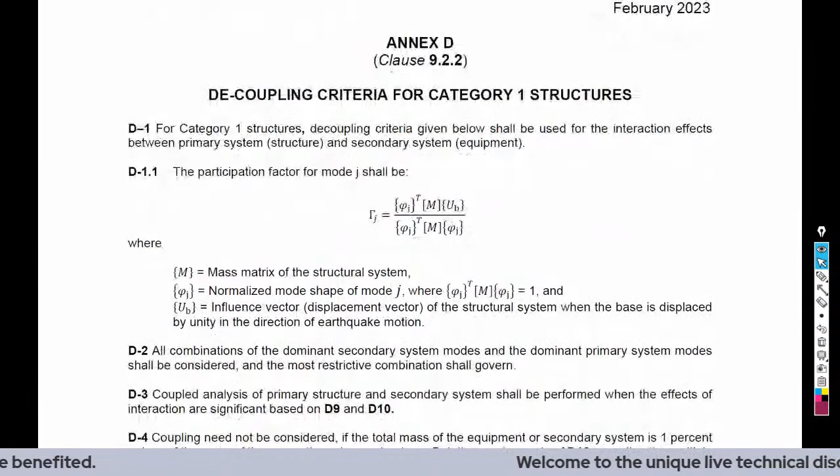So with this, we come towards the end of the document. Finally, this decoupling criteria is added for category 1 structures. It is almost similar.

Okay, so this was a quick study of the document. Based on my quick study of both the documents, I have highlighted a few points, and those points we have discussed.